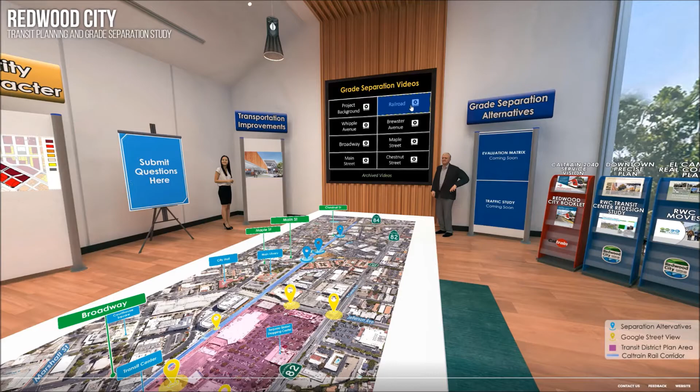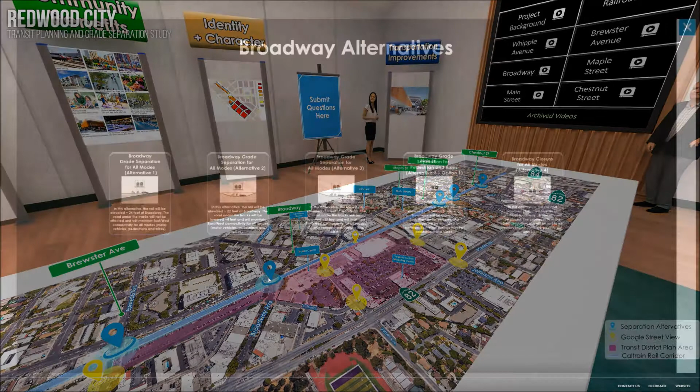To access the exhibits at Broadway, please locate the blue graphic in the middle portion of the table underneath the Broadway label. This will take you to the alternative selection screen, providing you with 5 icons to choose from: alternative 1, 2, 3, an additional option for alternative 3, and alternative 4.

The first icon takes you to an exhibit that shows the grade separation at Broadway for alternative 1, which provides a full grade separation for all modes of travel: motor vehicles, pedestrians, and bikes.

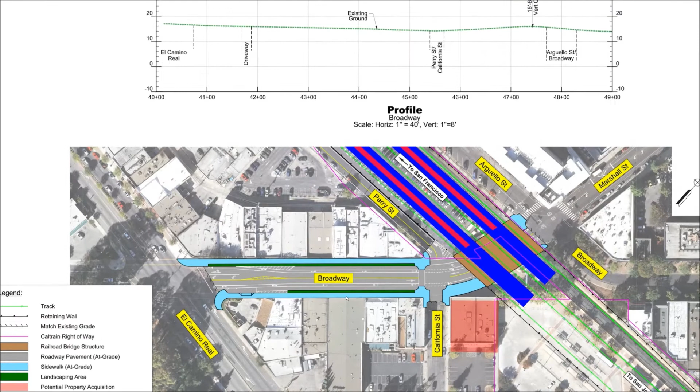Here we can see we have several options to click on: full screen mode, download, and section view. First, let's look at full screen mode. Click on this button in the lower right. This will put you into full screen mode, where you will be able to use your mouse to zoom in and pan to look at the plan or the profile in greater detail.

In this alternative, at Broadway, the tracks will be raised 24 feet, as can be seen on the profile. The road will remain at grade, as depicted by the gray color, roadway pavement at grade, and the light blue sidewalk, which is sidewalk at grade.

The elevation created by raising the tracks provides the vertical separation needed for the road to pass under the proposed rail structure without impact to any mode of connectivity. The blue here will depict the station platforms, and this reddish color will depict pedestrian bike ramps that will serve as a connection between the platforms and Broadway.

As part of the grade separation project, Broadway between El Camino Real and Perry will be updated to provide an 11-foot lane, 5-foot bike lane, 7-foot parking lane, and 5-foot landscaping areas along the roadway in both directions. The bike lanes will now be continuous from Arguello Street all the way to El Camino Real.

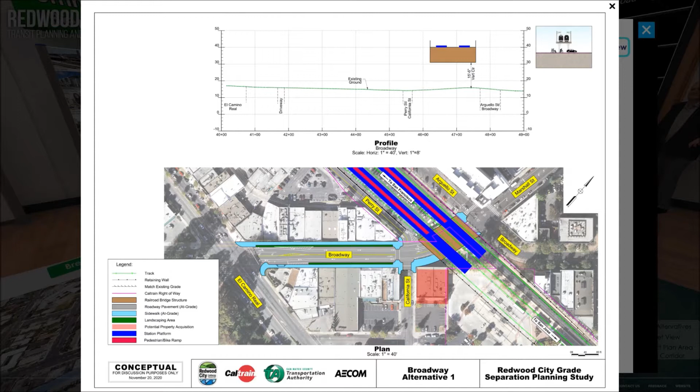Perry Street will be updated to show the two 14-foot shared lanes in each direction with an 8-foot sidewalk along the west side. To exit full screen mode, click the X.

Now back at the main view, we'll be able to look at the section cut views. These are shown in blue with arrows on each end. The arrows show the direction in which the view will be looking. These are the links to the roadway section cuts or profile views.

For example, on Broadway, you will be looking east towards Arguello Street from underneath the proposed structure. Here you will see that this is at grade, and we will be providing a 10-foot sidewalk, 11-foot lane, 5-foot bike lane, and 11-foot through lane in both directions.

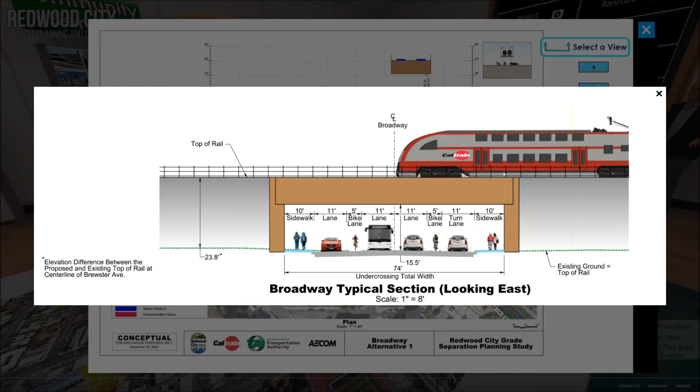Here, we will be looking from the station platform south towards Broadway. Here we can see how much the tracks are being elevated.

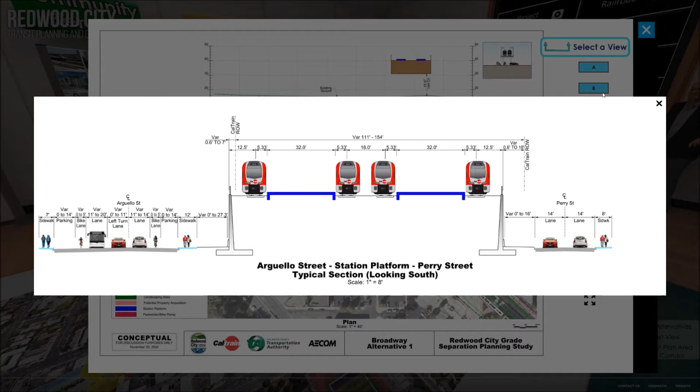Lastly, you can click on the PDF to download a copy of this so that you may view it later. Once you are done viewing this alternative, you may click on the X and head back to the alternative selection screen.

The second icon takes you to an exhibit that shows the grade separation at Broadway for alternative 2. Let's get started in full screen mode.

Alternative 2 will raise the rails as well as depress the road to fully achieve grade separation. The rails will be raised about 21 feet, as can be seen here on the profile, and Broadway will be depressed roughly 4 feet, shown here on the profile in purple and depicted on the plan view in this purple color, as well as the dark blue for the depressed sidewalk.

The lane layouts and bike lanes are the same as from the previous example. On the profile, you can see that the road begins its descent at the intersection of Broadway and Perry Street, dips under the bridge, and ends its ascent just past Marshall Street intersection. Note that this profile is exaggerated 5 times in the vertical axis.

This allows us to see the elevation differences between the roadway, the existing ground, and the tracks more easily. There will also be some grading at Perry Street and California Street to match Broadway.

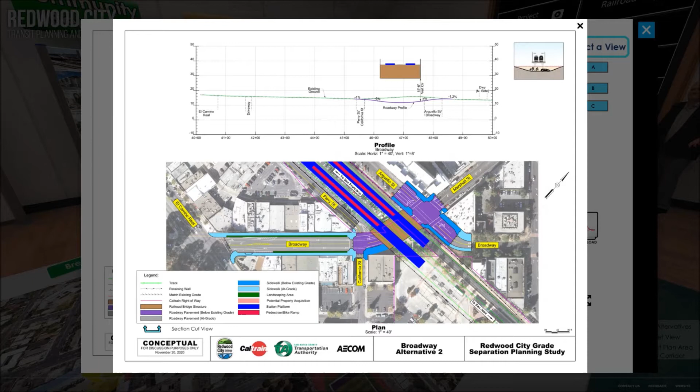On Arguello, the lowering of Broadway may have some impacts to the buildings on the corner. Pedestrian ramps may be needed in order to maintain access to the buildings. Let's take a look at the profile for Arguello Street.

Remember, a profile is like a longitudinal section along the center line of the road. This profile shows the road will begin its descent about 70 feet north of the intersection, match the lowered Broadway, and end its ascent about 80 feet south of the intersection.

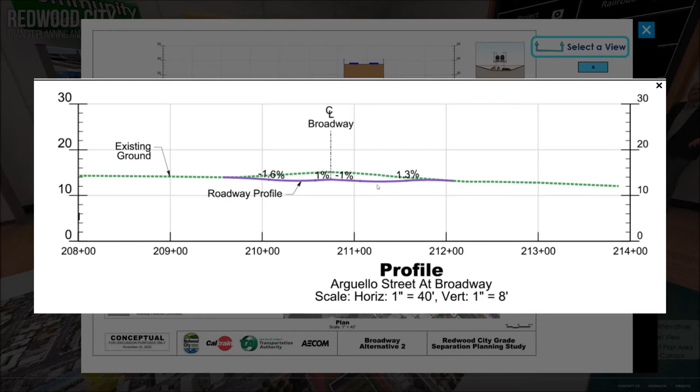The Broadway section, you'll be looking east on Broadway towards Arguello, underneath the proposed structure. You will see now that the road will be depressed from the existing ground.

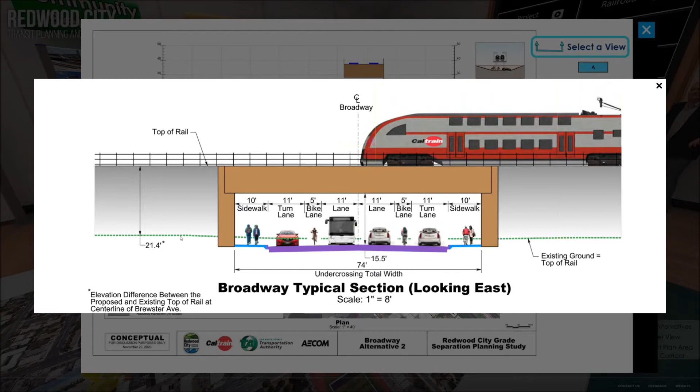If you would like to download this so that you may view later, click on this icon. If not, let's return to the alternative selection screen.

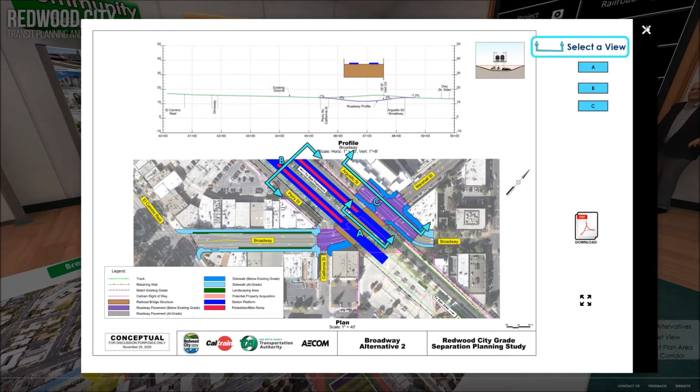The third icon takes you to an exhibit that shows the grade separation at Broadway for alternative 3. Like in the previous example, alternative 3 will raise the tracks and depress the road to fully achieve grade separation. The rail will be raised roughly 10 feet, and the road will be depressed nearly 17 feet at Broadway.

Connectivity for all modes of travel will be maintained. As we can see on the plan, the lane layouts and bike lanes are the same as in the previous example.

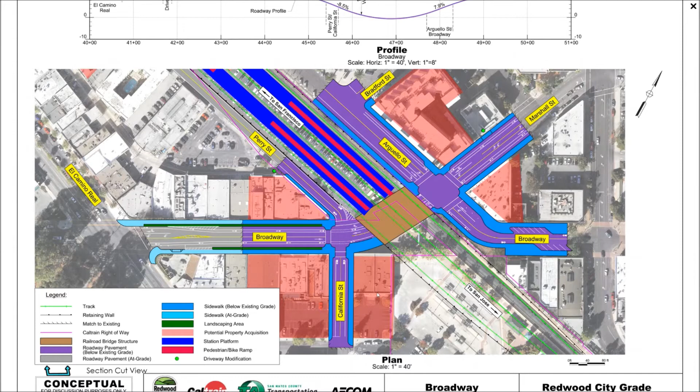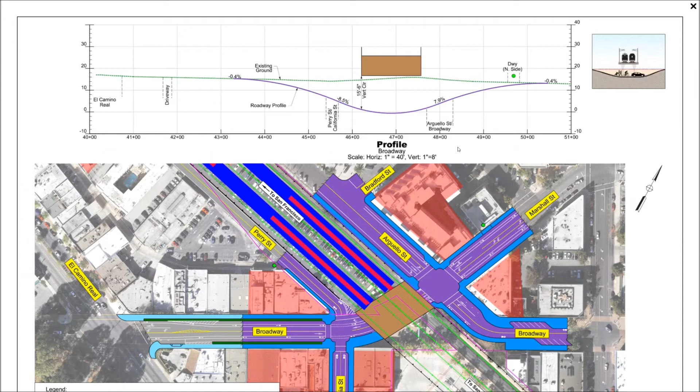Here on the profile, depicted in purple, we can see that Broadway will begin its descent 220 feet east of El Camino Real, dip under the bridge, and end its descent on Marshall Street near the Warren Street intersection.

Some property may be acquired to accommodate this design. The potential property acquisition areas can be seen in red. The green dots, shown here in the legend, depict driveway modifications, seen here at Commercial Way to adjust for the elevation change of Perry Street, and for the driveway here for the elevation change on Marshall Street.

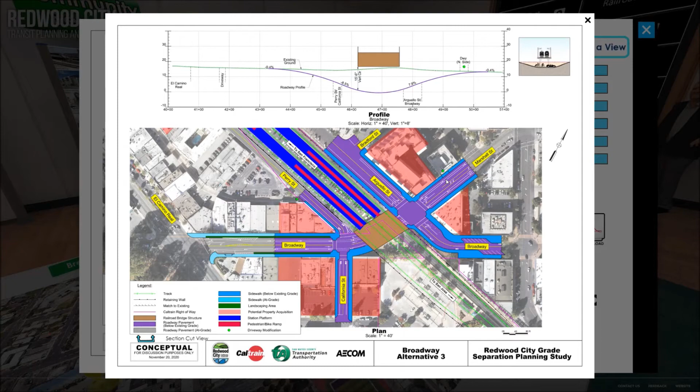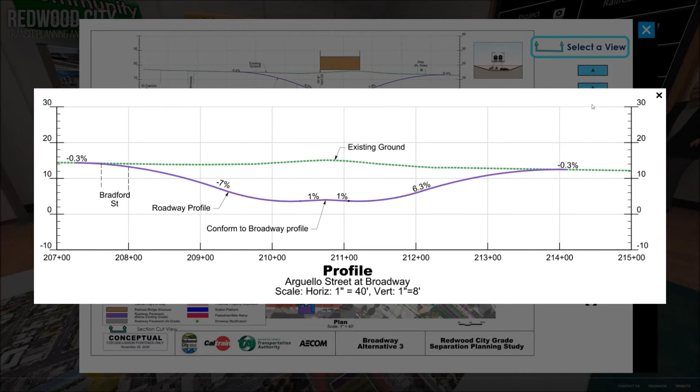Now let's take a look at the profile on Arguello Street. The road will begin its descent just past Bradford Street to match Broadway nearly 11 feet below grade, and end its ascent just before the Winslow Street intersection.

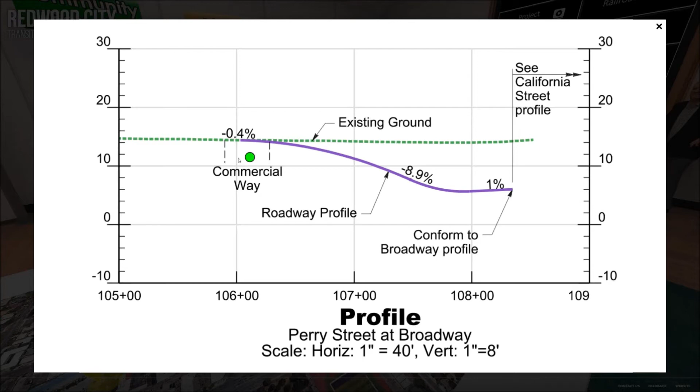On Perry Street, the descent will begin at Commercial Way, and then meet the elevation of the depressed Broadway about 8 feet below grade.

On California Street, the profile will begin its descent at Winklebleck Street and then meet the elevation of the depressed Broadway, roughly 8 feet below existing grade.

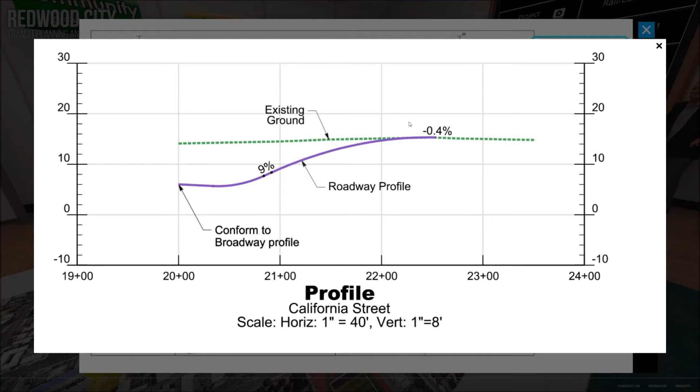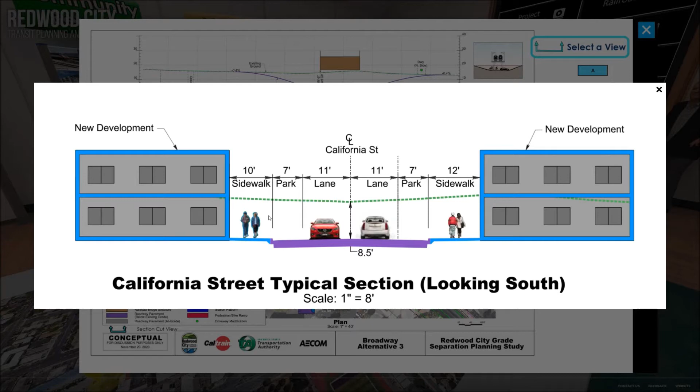Now let's look at the typical sections. For California Street, we can see that the lane layouts, the parking, and sidewalks will be maintained, with potential for new developments on both sides.

For Broadway, you will be looking east towards Arguello Street from underneath the proposed structure, but this time you will see that the road is lowered nearly 17 feet.

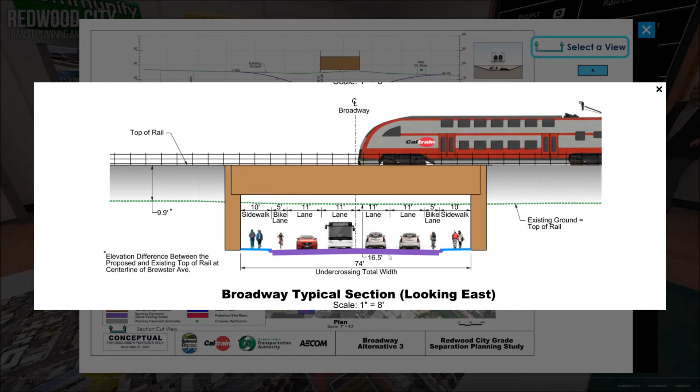And when selecting this one, we will be standing south on the platforms looking towards Broadway. Again, we can see the rails and platforms elevated from Arguello and Perry Street.

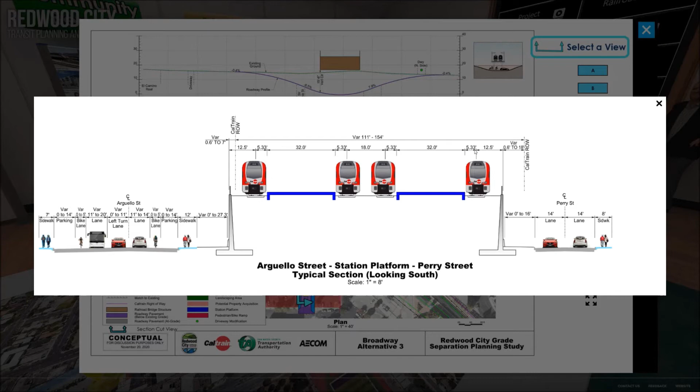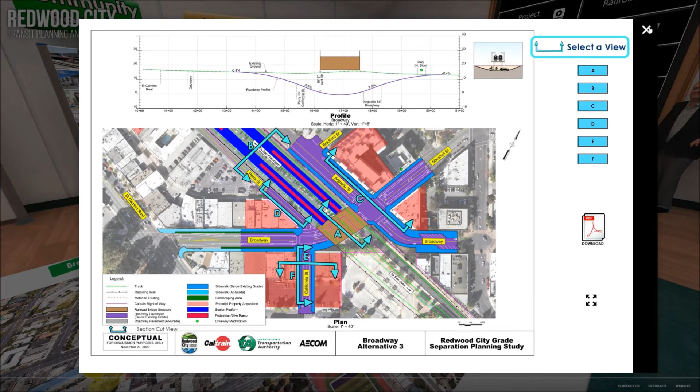Lastly, you have the ability to download and save this PDF so that you may view it later. When you're all done looking at this alternative, you can return to the alternative selection screen.

The fourth icon takes you to an exhibit that shows a grade separation of Broadway for pedestrians and bikes only. This concept was developed to provide the city with an option for closing Broadway to motor vehicles and minimizing impacts to properties. A traffic analysis is currently being performed to determine the impacts of this closure.

Over here on the left, this design would correspond to Broadway Alternative 3. The rail design is the same from the previous example, but Broadway would close to motor vehicles, depicted with the red X, to identify access removed.

But a 20-foot wide tunnel is provided under the tracks to maintain connectivity for pedestrians and bikes. The ADA accessible ramps are for people walking or with bikes and are shown in this reddish color.

The ramp will begin its descent from the plaza area at the intersection of Broadway and Perry, and from the bus station. The 80-foot ramps would come down to form a single ramp, then make a left turn to proceed under the rail. After passing through the tunnel, pedestrians will then make a 90-degree right turn and proceed south for 225 feet. The ramp will then meet up with the existing sidewalk on the south side of historic Broadway.

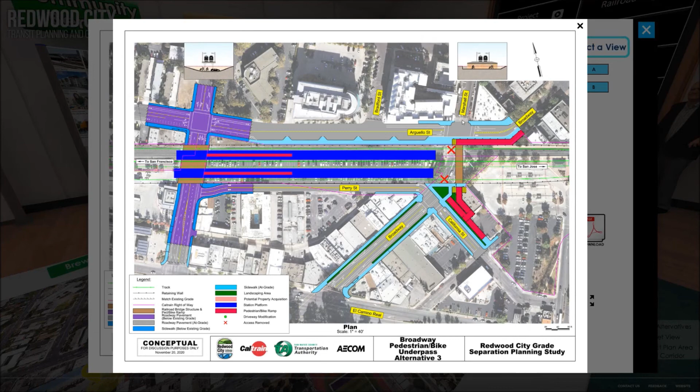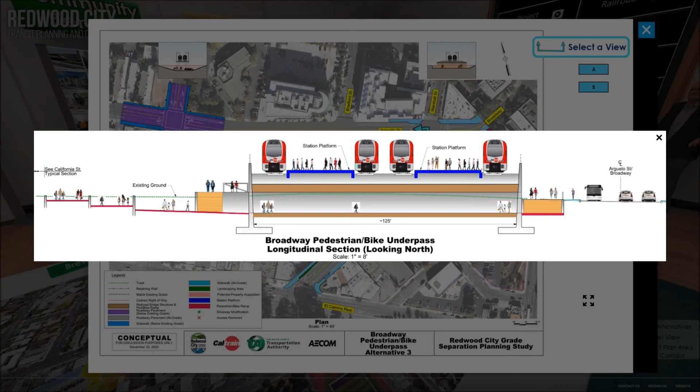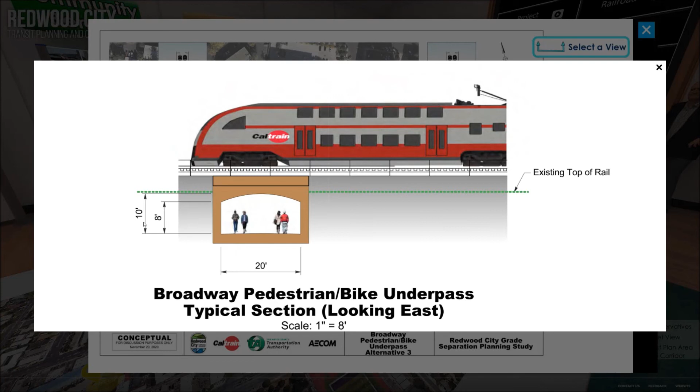The second one shows a section cut through the tunnel looking east, where we can see a 20-foot wide tunnel, 8 feet high, with a max height of 10 feet.

Lastly, the ability to download this PDF by clicking on this icon so that you may view it later.

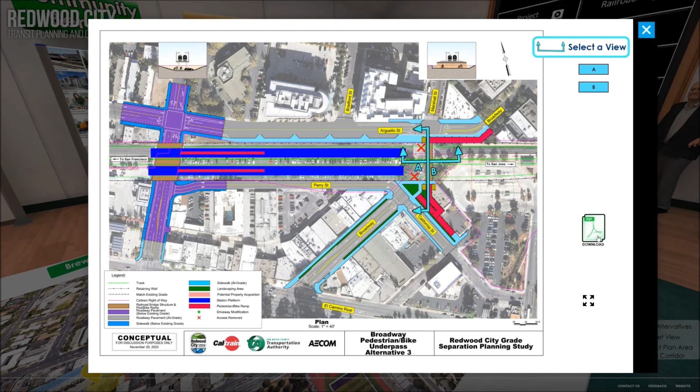Lastly, the fifth icon is for Alternative 4, which only grade separates Whipple Avenue, so the rail elevation will remain the same as it is today at Broadway.

The station platforms, shown here in blue, will be placed between Brewster Avenue and Broadway. Due to safety concerns of having a 4-track station at grade, Broadway will be closed between Perry Street and Arguello Street, as shown by the red X's, which depict access removed.

This will be closed to all modes of travel: motor vehicles, pedestrians, and bikes. The closure at Broadway will create the same lane configurations for the T intersections as shown in the previous example.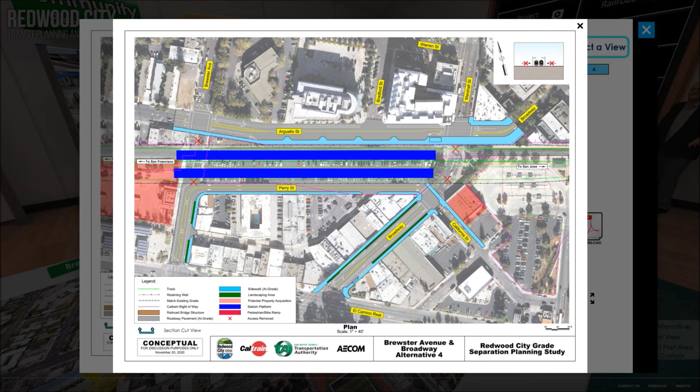Let's take a look at the typical section. Similar to the previous sections, you'll be looking south from the platforms towards Broadway. The section does not show any elevation difference. Rather, the rails, station platforms, Arguello Street, and Perry Street will be side by side.

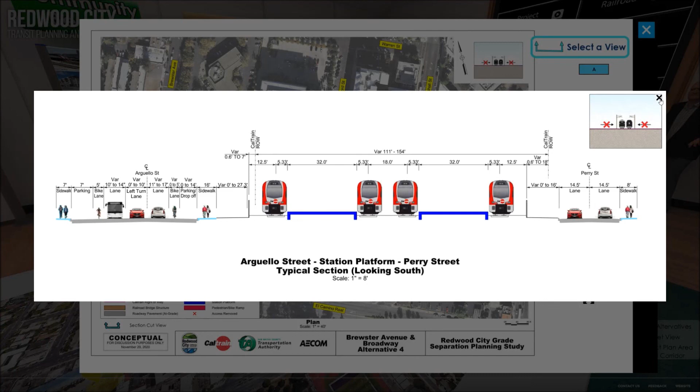With the station platforms at grade, there are challenges with platform access without having to have pedestrians cross the rails. Further details on the station access and pedestrian access will be developed in the next phase of work for this alternative.

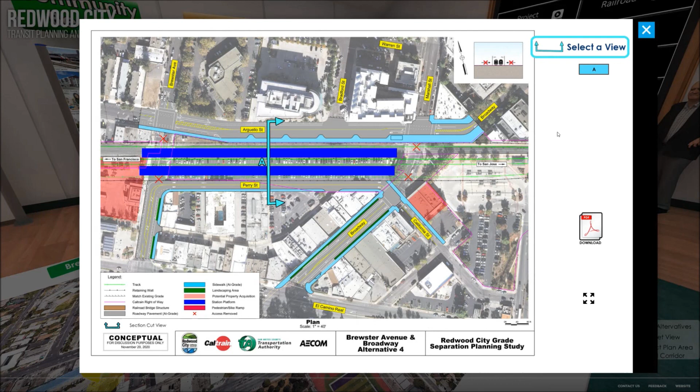This concludes the Broadway alternatives. Thank you very much.